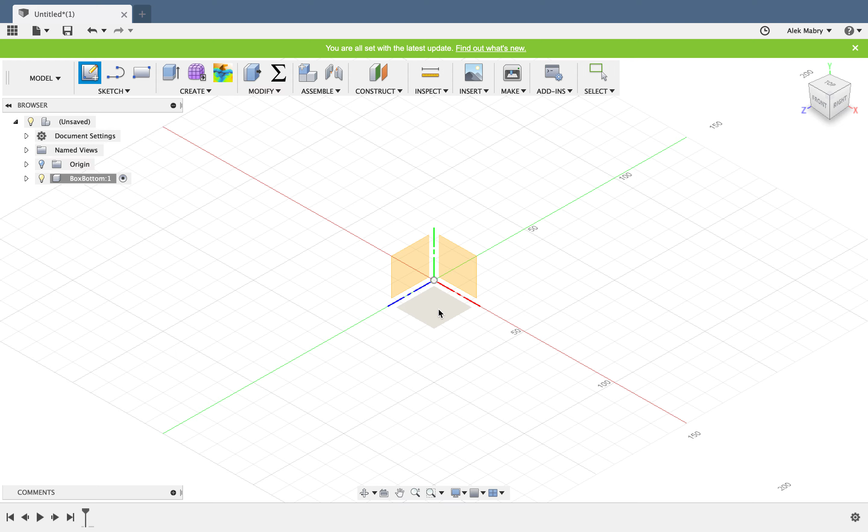Now you can see this little dot, which means this is now the active component. So when we start drawing, we're drawing in this component. Now you can create a sketch on the bottom surface, using some eyeballed dimensions, and then extrude it.

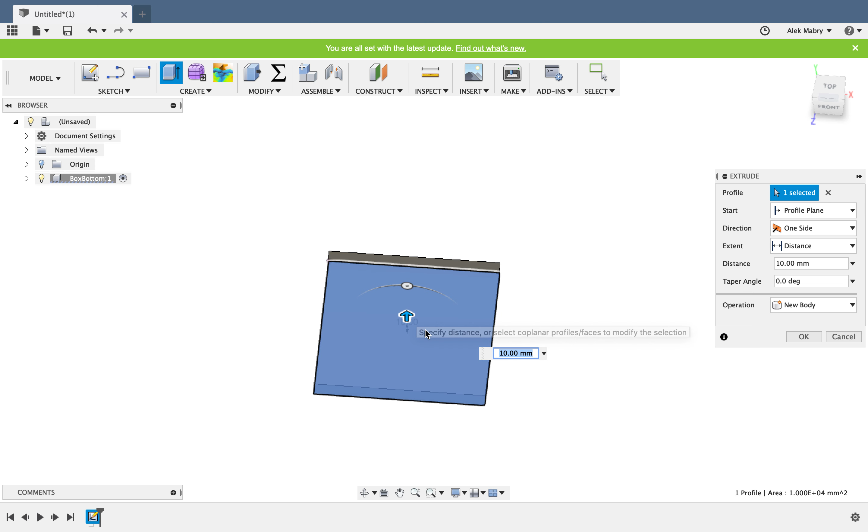Now I want to make little joint tabs, so I can sketch on the top again and draw another rectangle.

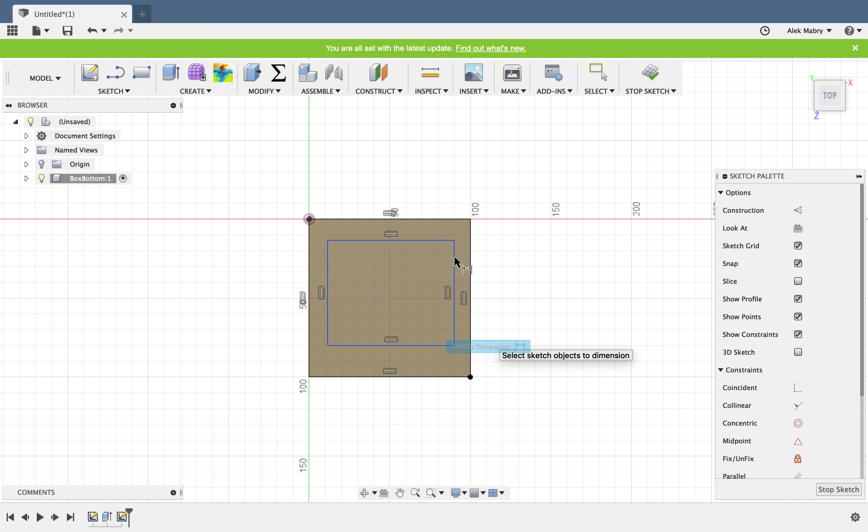If you've noticed, I've been dragging to select a tool. If you drag down with your right click and hold, you can see your different tool selections. So if you quickly drag the shape you want, in this case down and then to the left to bring up your sketch dimension, it will bring up your tool automatically.

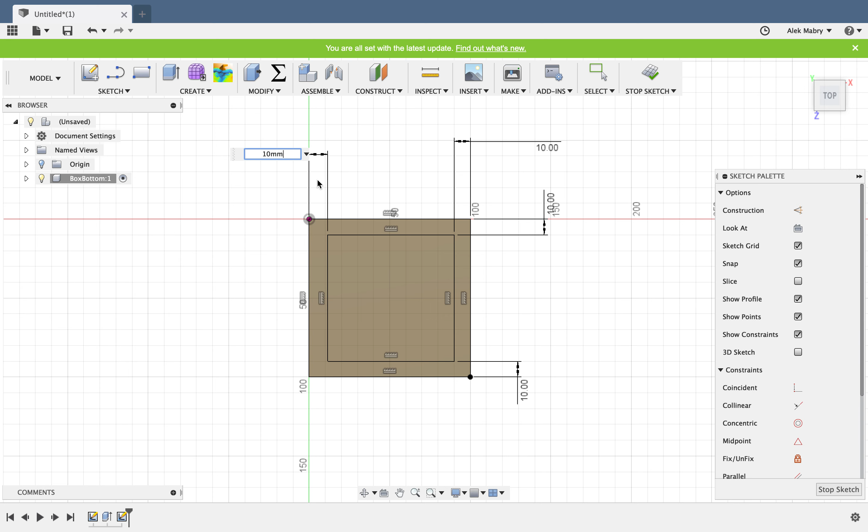Now I'm done with this. I can extrude this inwards 5 millimeters. So now I have my bottom shape of my box.

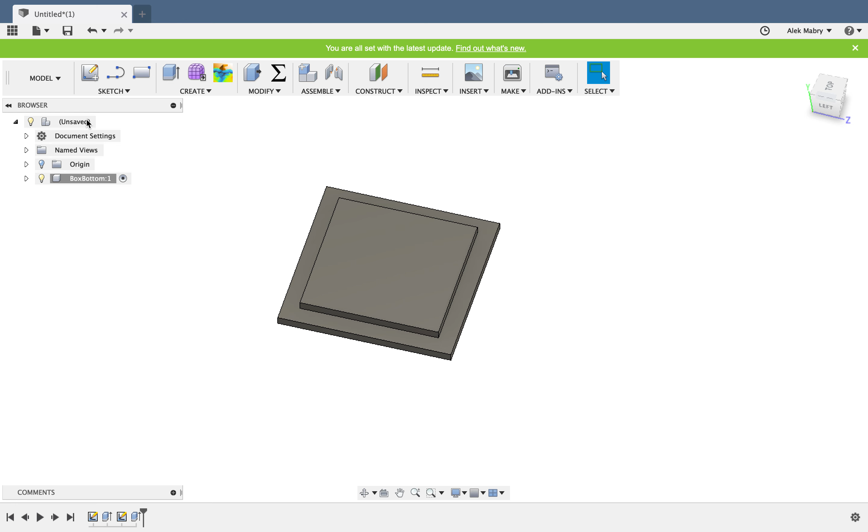Right now my box is my active component. I'll go back up here and make the world my active component by right-clicking and selecting Activate. Now I will make another component, and we'll call this one Box Side.

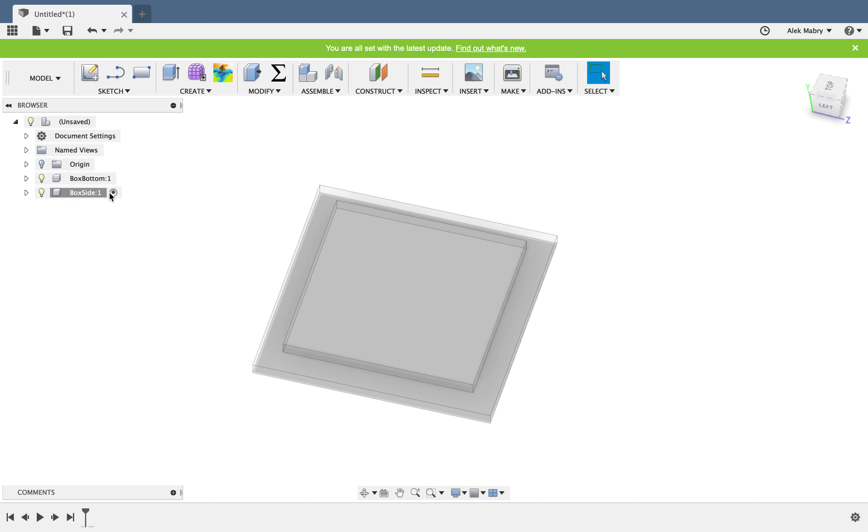Now with Box Side, since this is the active component, the bottom box is transparent, meaning we can't edit it anymore. But I don't want to see this box part at all, so I can right click and isolate it. Now I'm working on the box side.

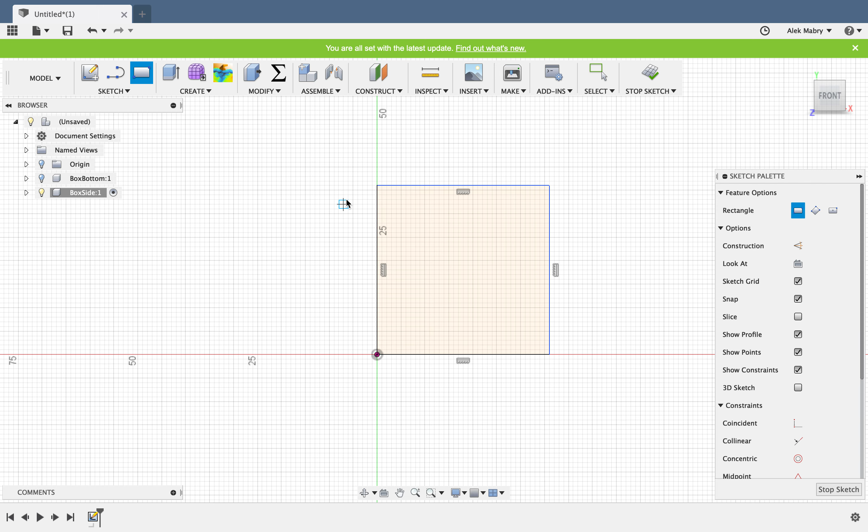I'll sketch on a plane, the left or the front plane in this instance, and make it 100 millimeters.

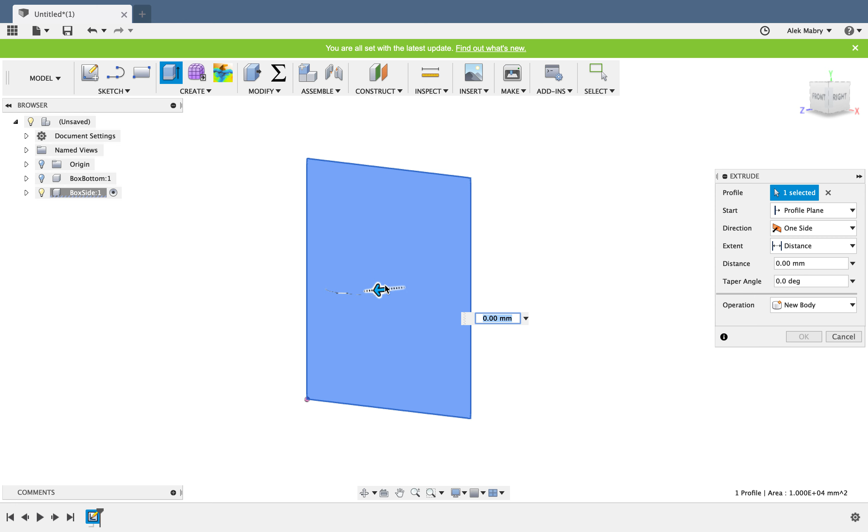Now I will extrude it 10 millimeters. And then finally, I want the pieces to have a... not a fillet, a chamfer instead.

So we'll select these two surfaces, and then you can drag inwards. 10 millimeters, that's good.

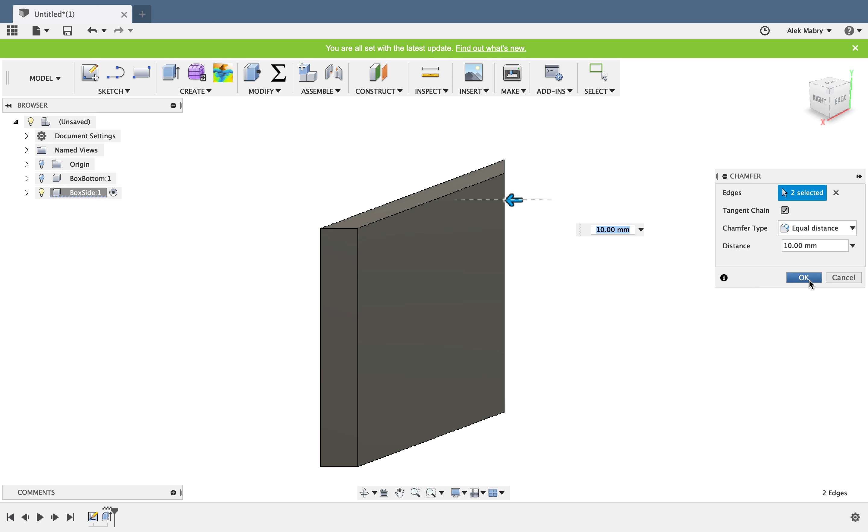Now we can go back and select the overall world as the active component. We have to leave isolation though, unisolate. And now you can see we have this bottom shape and this top shape.

So now it's time to start connecting them together. You can see I can move them around freely right now, and I'd ideally have them connected together. So what I can do is go to Box Bottom and make it...

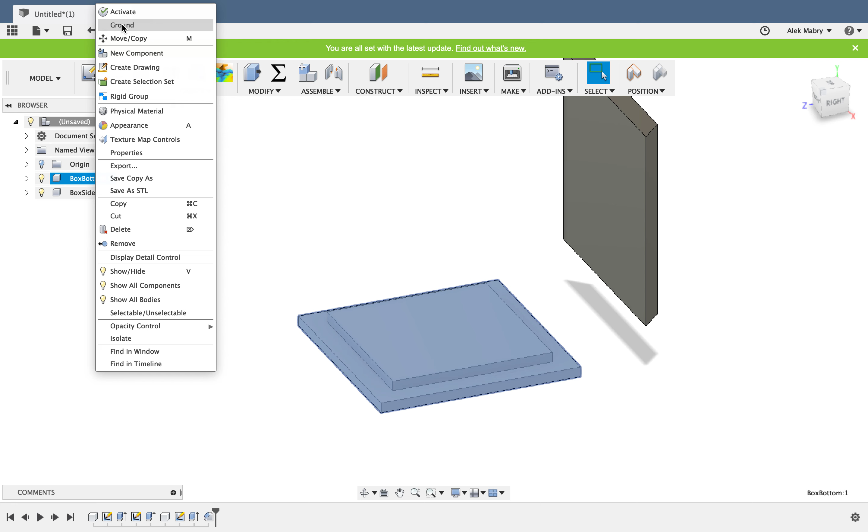I'll ground Box Bottom. This means that Box Bottom can no longer move. If I click on it, it won't move. This is now the base of our assembly.

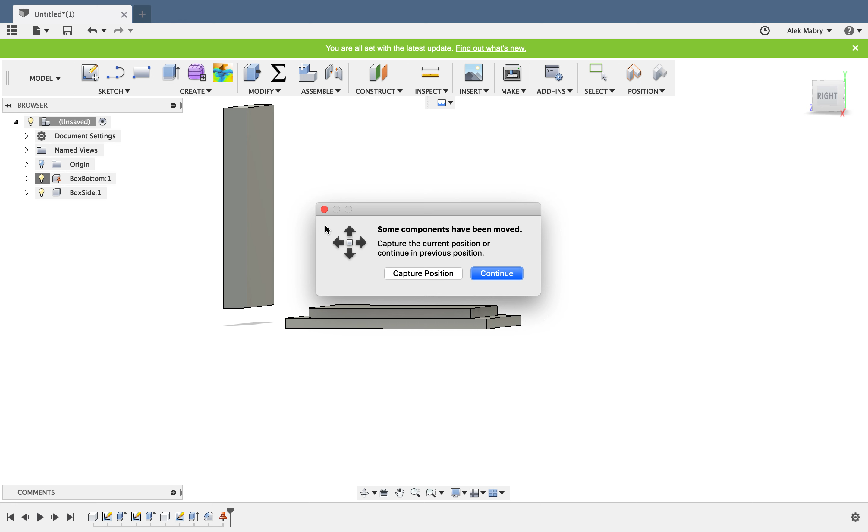Now I can take my box side and connect it to that. So I can go to the Assemble Joint tool, and it says some components have been moved. That means I've moved them from their initial modeled position. Just click capture position, otherwise it will jump these back to where they were originally.

Now I'll use a rigid connection, and then I will select on the bottom surface, on this edge right here. So that's our first point.

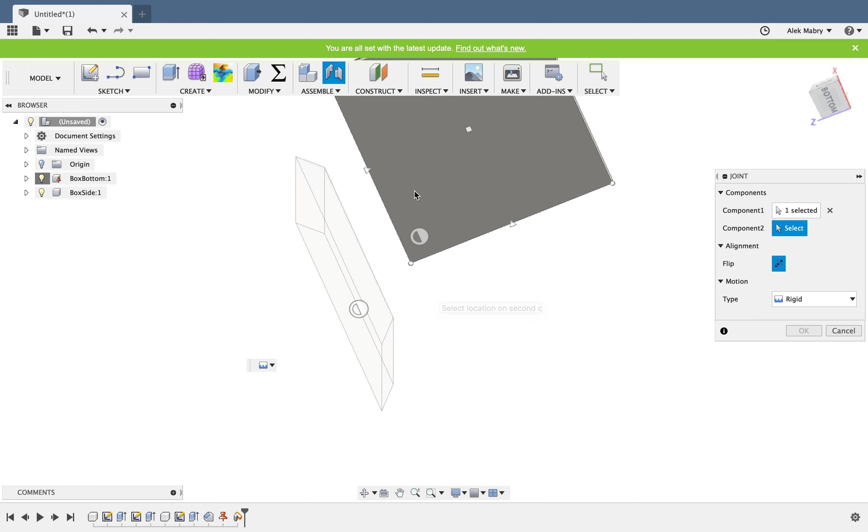Now you have to choose on the other model where it connects to. If I do it like this, it will essentially connect this sideways outwards. But if I make sure that this little circle is facing upwards, it will connect correctly.

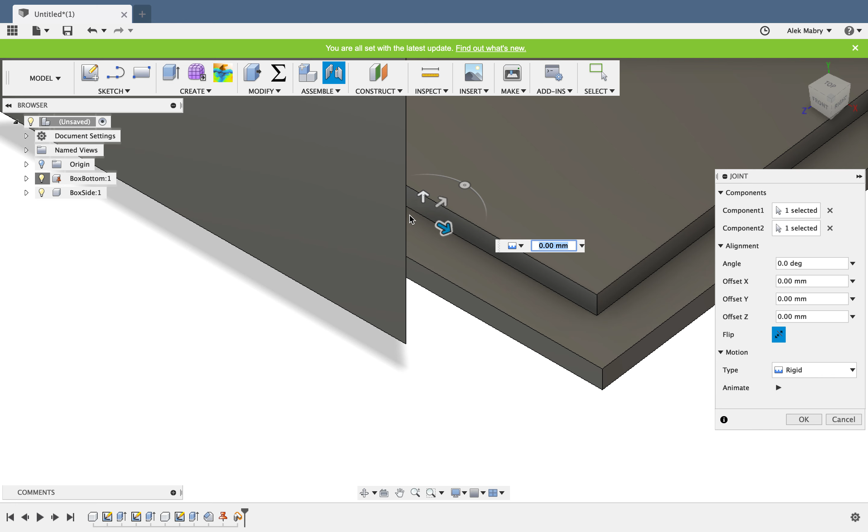Now that I've connected it, I can actually offset it as well, but I'll keep it where it is and just click OK. Now this piece is connected to this piece, so if I pull on this piece, it won't move because it's connected to this grounded piece right here.

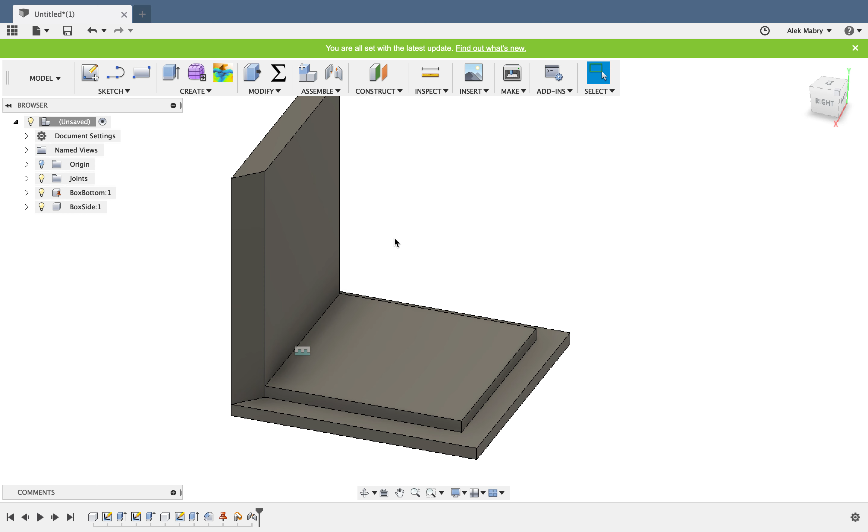Now obviously this is only one side of the box, and we're going to need multiple sides. So I can duplicate it with Control-C, Control-V, or Command-C and Command-V if you're on Mac. Then you can drag this second object wherever you like.

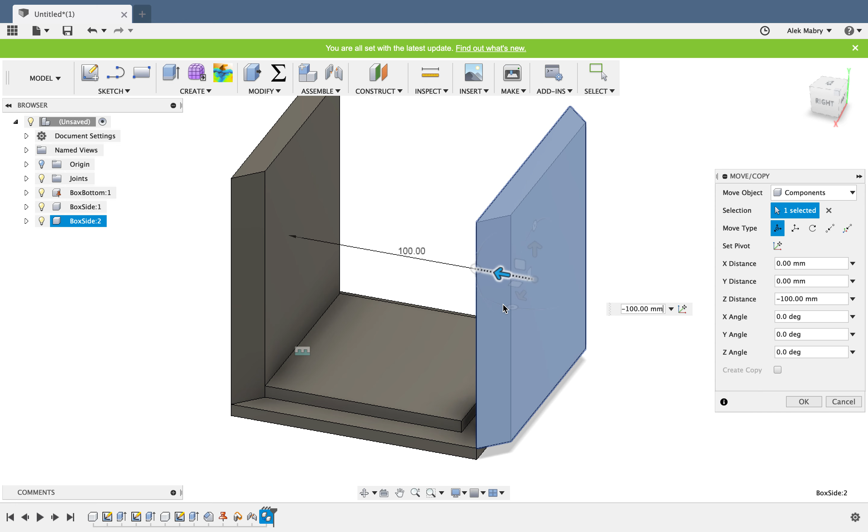I prefer just to move it out and then rotate it how I want it, generally how I want it to be positioned.

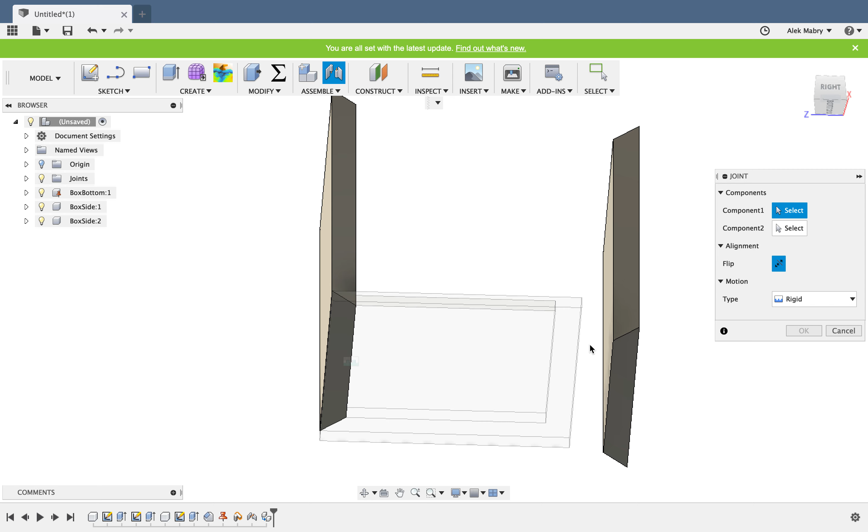Now I can connect it once again with the Assemble Joint tool, so I can join it another way. Last time we joined the bottom of this corner to the bottom of this edge. Instead, what we can do this time is bind the front face to this face. As you can see, you get the same result.

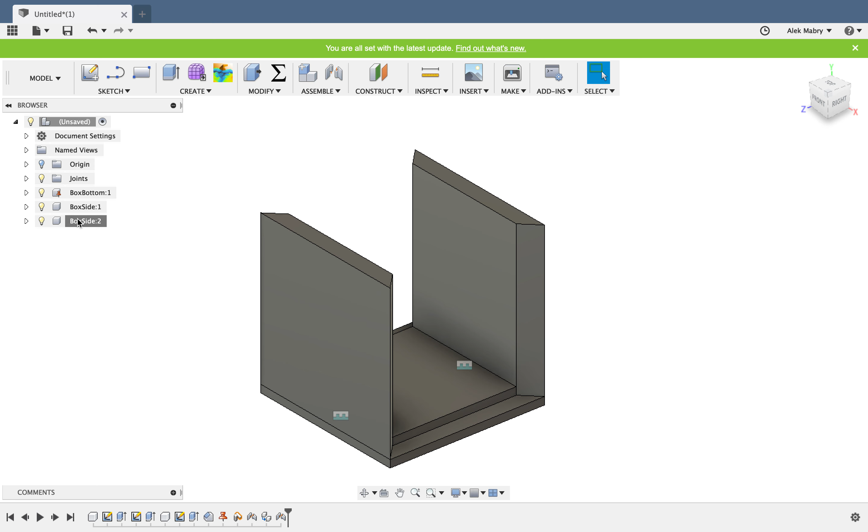Now I can duplicate it again and move it where I need it.

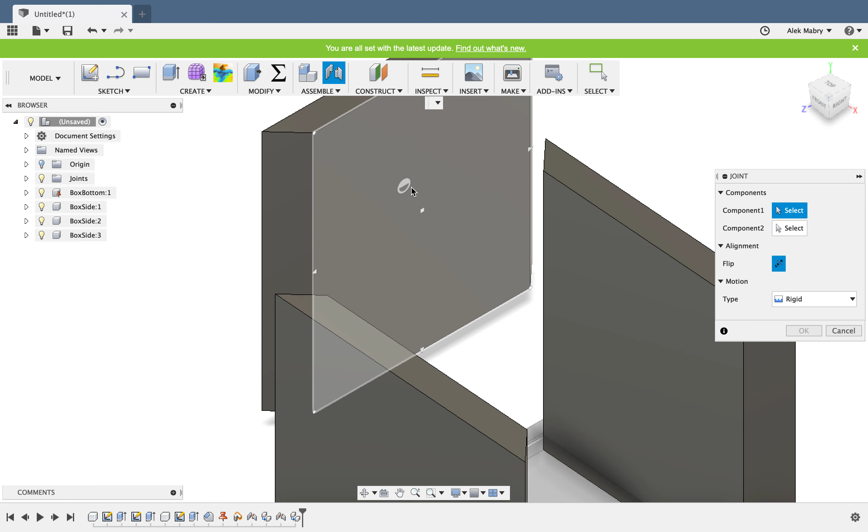Okay, and then I go to Assemble Joint. Now here's what happens if you don't put the dots in the correct place. So if I choose in the middle right here, and then I choose, say, the middle here, it's going to...

Line up those two points, and then you'll get this weird shape. And yes, you could offset it, but these aren't the best joints, because if you change the shape of this bottom thing right here, then you have to come back and change your offset dimensions, and it won't automatically reset itself.

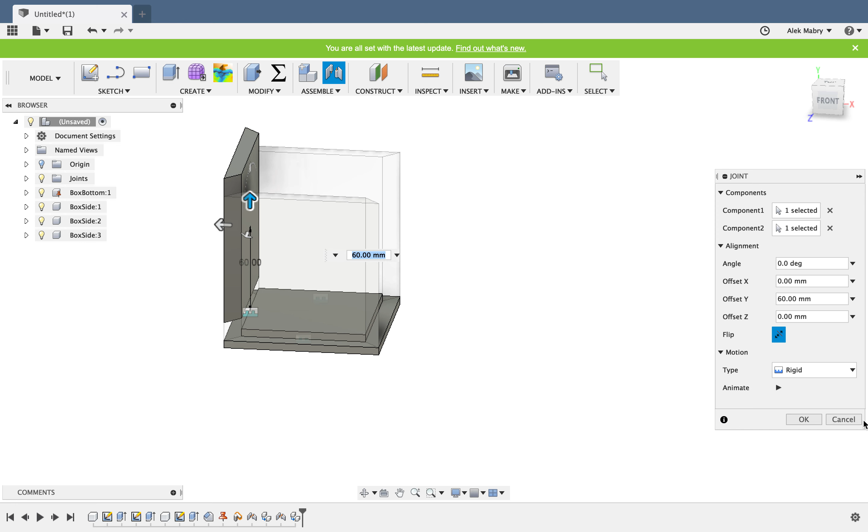Oh, thank you. So then we'll join it just like the other ones. I can join it in the corner actually, if I wanted to, although this is not the best joint technique.

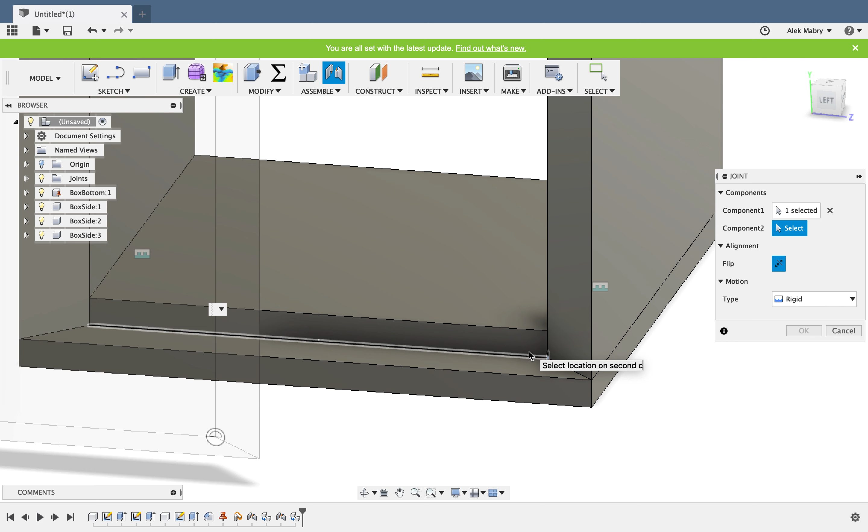And now it's connected. So now, since these three components are all the same component, you can see they're labeled 1, 2, and 3. That means if I change one, it will update all of the other ones.

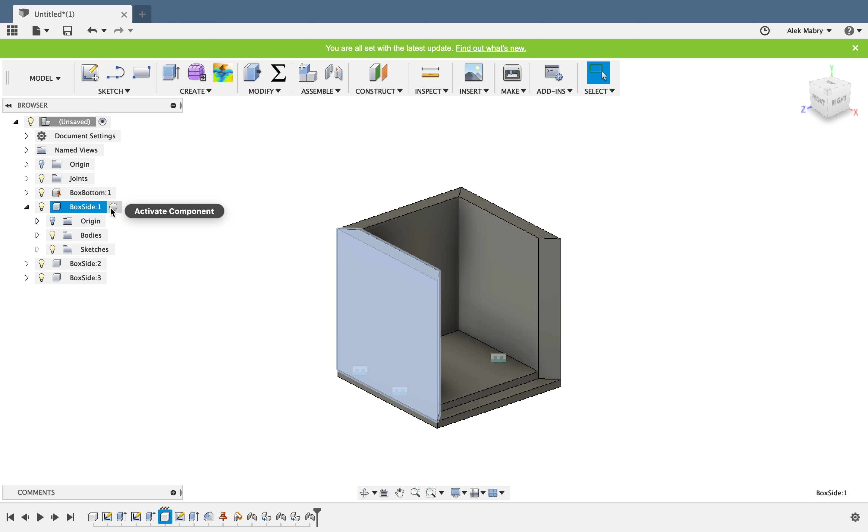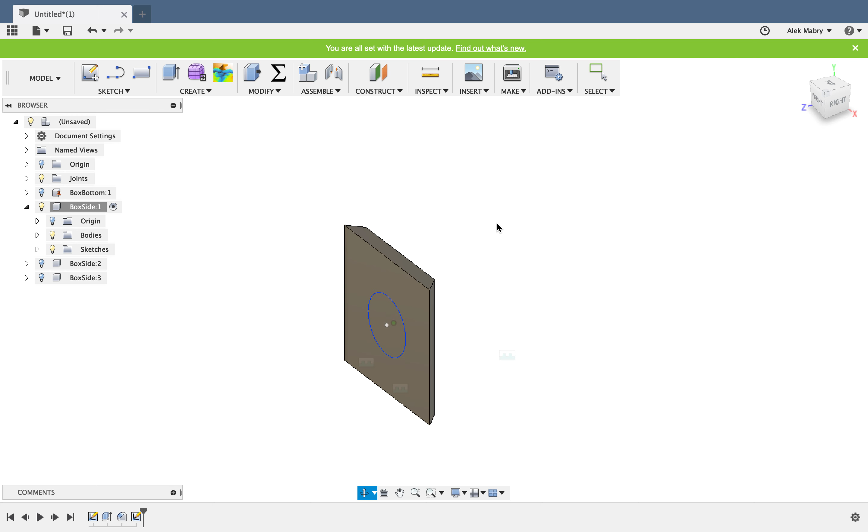So if I click Edit on this component, if I decide to edit one of the original sketches, or actually what I can do instead is I can activate the component, isolate it, and then I can sketch on its surface, and I'll make just a random hole in the middle and extrude it through the surface.

I can actually choose, rather than a distance, up to a surface, so I'll select the surface, so it always cuts through. And now if I exit my isolation, unisolate, you can see that it's now updated all of the other components that are the same.

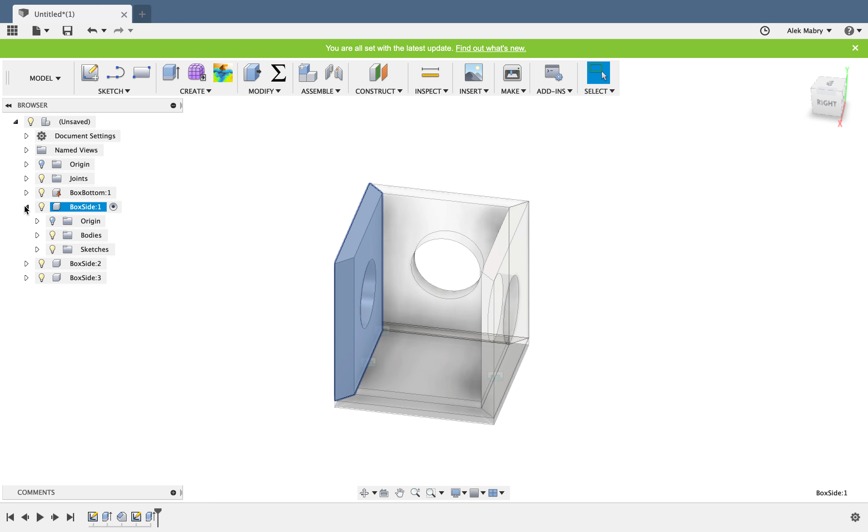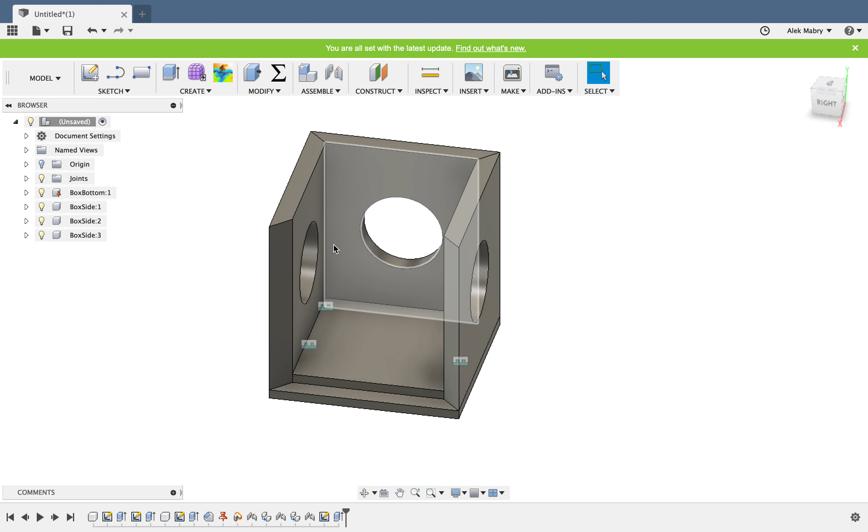Now what I've done right now is I've done essentially a bottom-up assembly. So when you're CAD modeling, there's two ways to build an assembly, either a bottom-up assembly or a top-down assembly. A bottom-up assembly is when you design each component individually and then move them into place. You could also do a top-down assembly, which is when you make a new component based on the previous components you have in your model.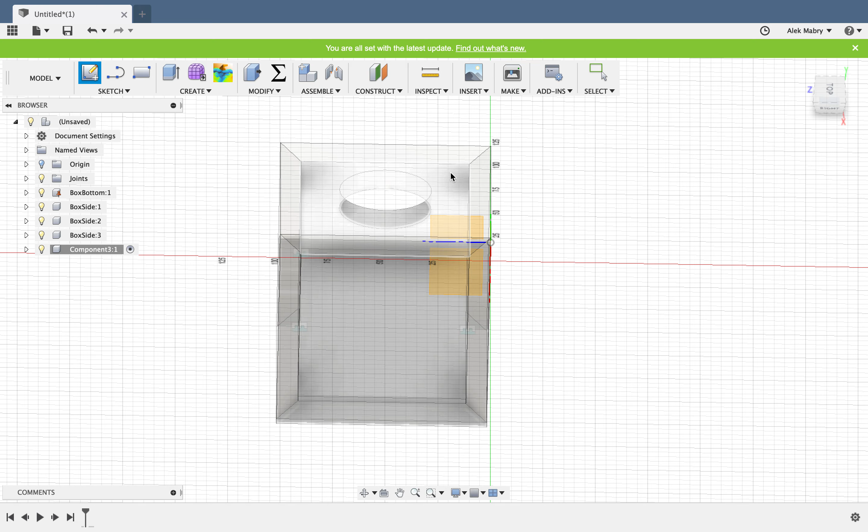So say I want to make a new component, and I have it isolated, I have it activated, but I haven't actually isolated it. I can choose the top plane, and then I can make a sketch based on the existing shape. And I'll just make a square, stop the sketch, and then extrude it.

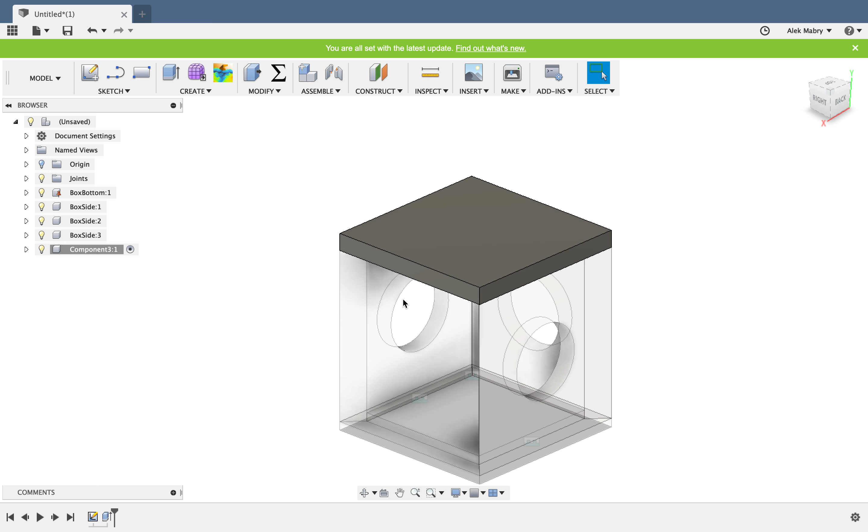And now I have this top component. You can double click to rename actually, so we'll call it box top. And now I can activate the whole entire world, and since we haven't actually joined this component, I can move it around.

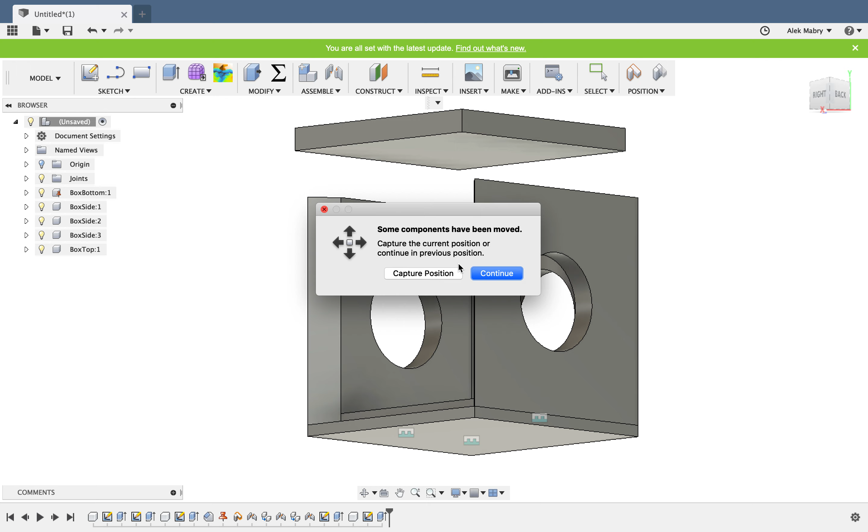So I will joint it right here. Okay, and now, because this component has been made after every other component, if I change a component that was made before it, this will now update.

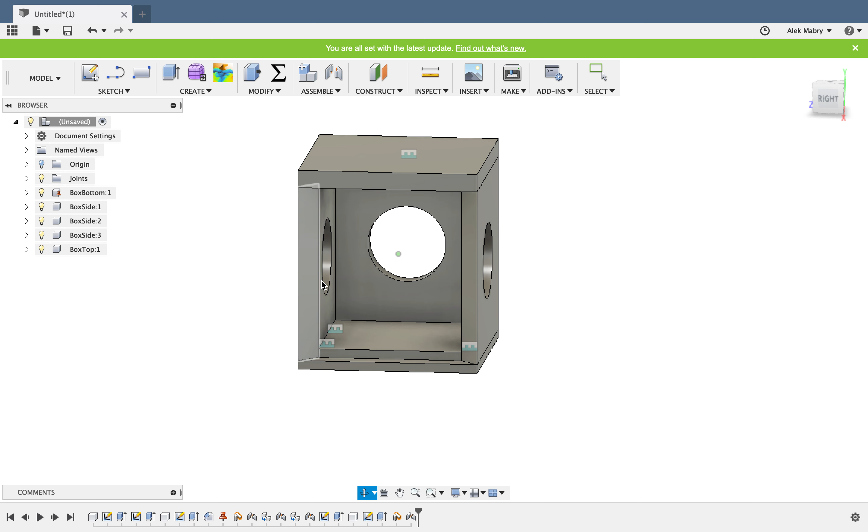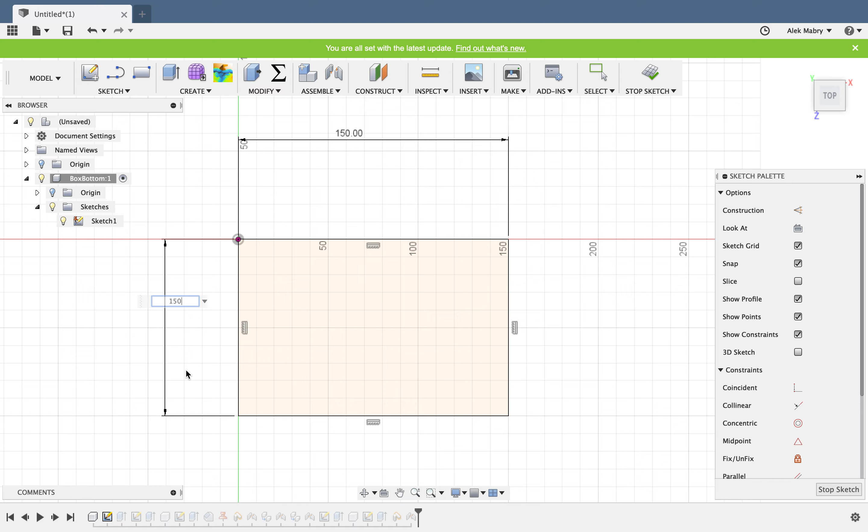So now if I go back to box bottom and I edit its sketch, the very first sketch you can see down here in the timeline, if I scroll back the timeline here and edit it, or I can just right click and click edit sketch, and I change the dimensions. Now I stop the sketch.

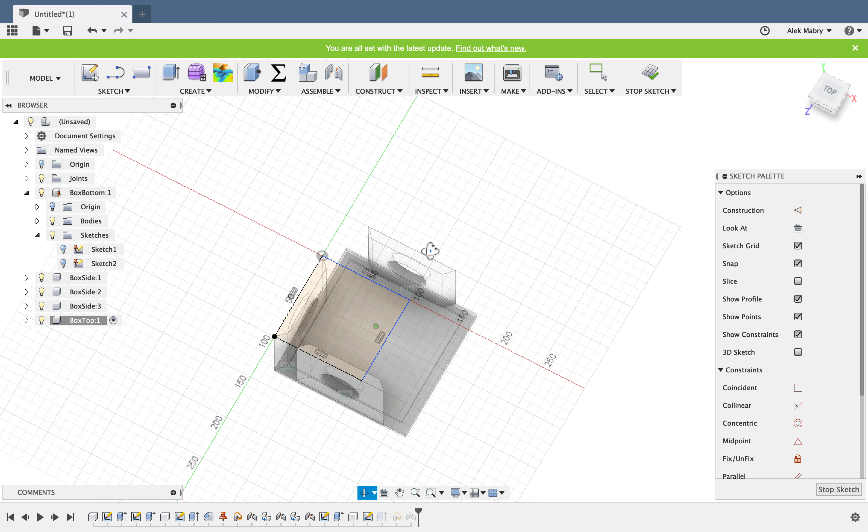Oh, so the reason why this isn't updating is because this isn't constrained to this edge. I kind of just drew the shape, sorry about that. So see, this isn't actually constrained to the edges of the existing shapes. So this should be coincident with this point right here, and this should be coincident with this point. There we go.

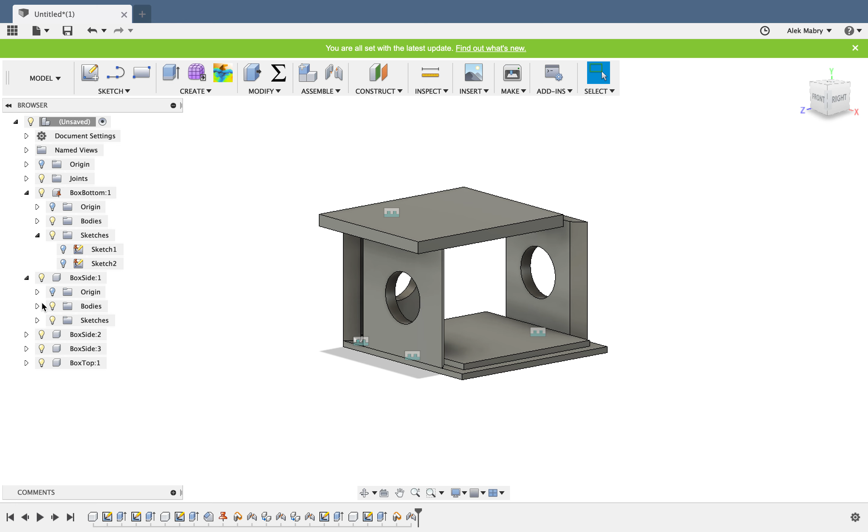So now you can see it automatically updates. And then I would have to go back, of course, and change the box side as well.

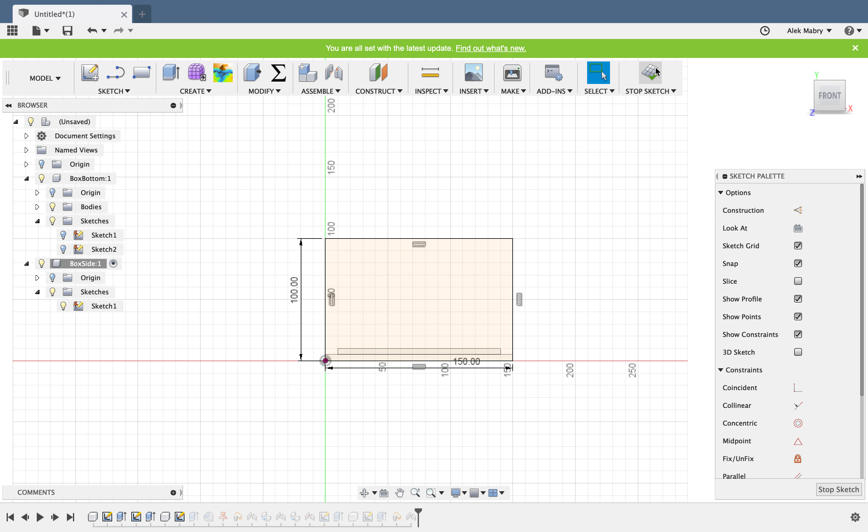So I'll change this to 150. And see, because we built this box part bottom up, that means I have to go back and change it after the fact, as opposed to if I built top down, as in this component is based on this component and this component is based on those components, then if I change this, everything else will update. However, because I made each part essentially individually, that means when I change one shape, I have to update all the other shapes. So this is how to use...